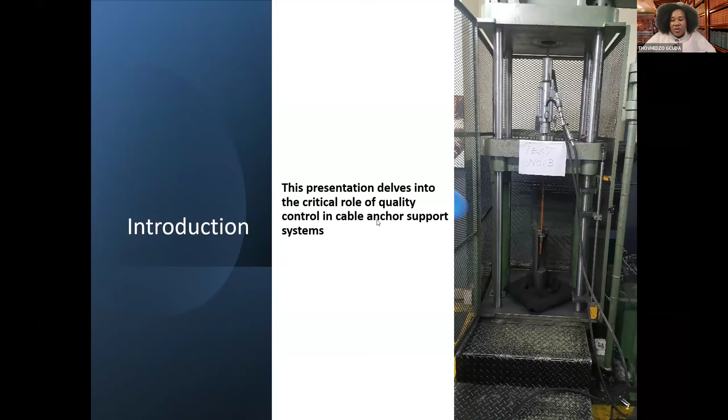So cable anchors are used where there's high support demand, more especially in our poor ground condition areas, as well as areas where we've got large excavations or capital excavations. And in this case, because of the high risk of fall of ground, if quality control is not done properly throughout the value chain, then we risk having a massive fall of ground that will disrupt production. For example, if that is in your conveyor belt, that means you cannot continue mining because you cannot transport the ore. Or if it's in a crusher, then you're going to be losing equipment.

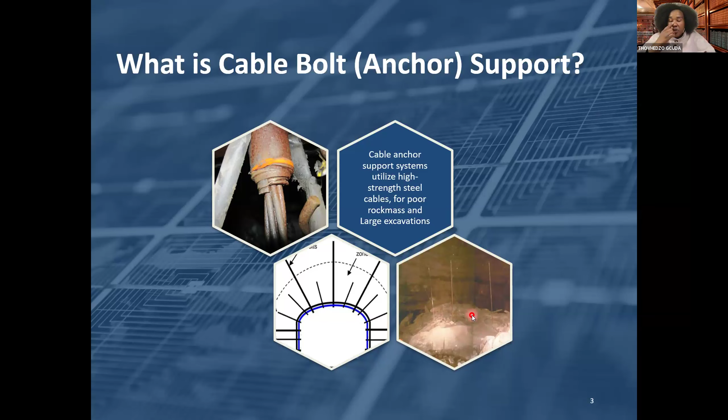And then in an unfortunate case, we normally have multiple fatalities because in these excavations, for example, if it's a workshop, there will be machinery and there will be engineers working on that machinery. So when there's a fatality, it normally involves more than one person. So that's why it's important that we do proper quality control to enhance safety.

So here I'm just describing what the cable anchor is and how it looks. So the length can be variable. Our primary support, normally a resin bolt, could be anything less than 2 meters. The longest could be 1.8 meters or 2.2 meters. So when we require secondary support, then the cable anchor has a length of about 2.5 to maybe 6.5 meters. And then in massive mining, it can be more, maybe more than 10 meters.

So these are the components of the cable anchor: you would have the barrel, and then you'll have the face plate, and then you'll have the grout tube, which we use for grouting, and the breather tube that will show if the hole is full of cement. And then you'll have the expansion shell, which is used for anchoring.

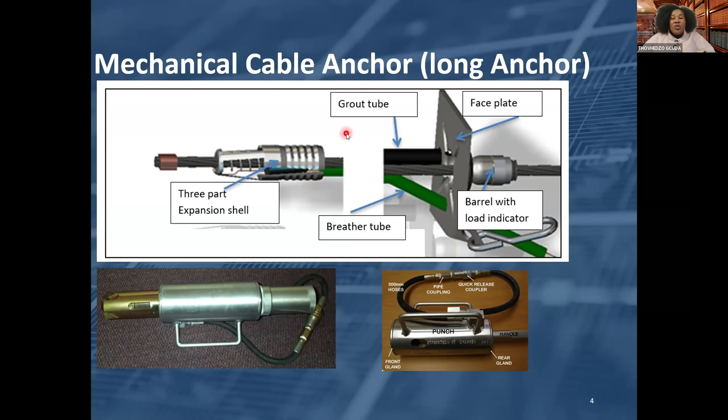So my main focus will be on mechanical anchors, because here in South Africa, most operations are still using mechanical anchors, although there are a few mines that are fully automated. So the installation method is normally conventional, whereby you still have human intervention, or semi-conventional. For example, for this one, we've got a remote drill rig, whereas here it can be semi-mechanized, whereby the twin boomer will drill the hole, and then a person will be required to go and grout, or even insert the cable anchor and tension it. However, with the twin boomers, some cable anchors can still be tensioned with an adapter using the drill rig.

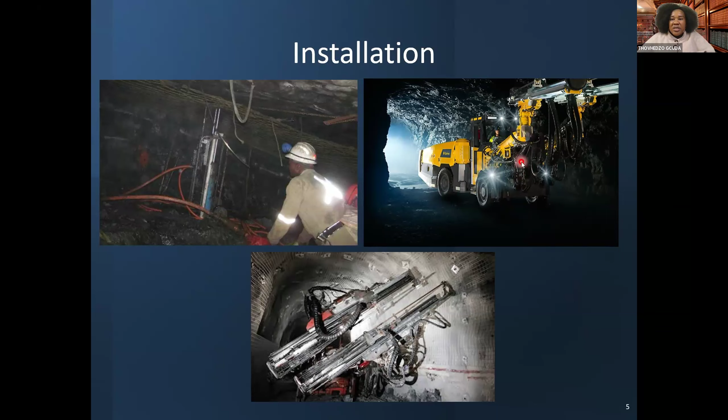So the support principle of cable anchors: we use it for different failure mechanisms or support mechanisms, of which in this case we'll be using it to build a thick beam. For example, here we've got laminated strata. As we know, the thinner the beam, the higher the risk of instability. So you'll want to clamp these beams together and then anchor them into competent ground, so that this one solid thick beam will be more stable.

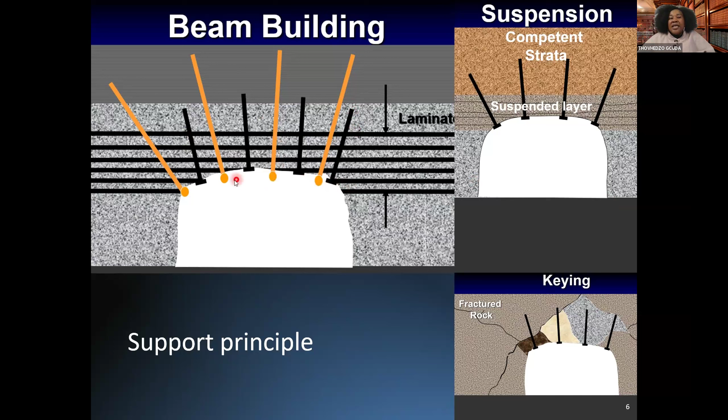And then in another case, you'll use it where you've got poor ground conditions overlaid by competent rock. For example, in our coal mines, after mining you could have a layer of poor quality coal that you want to suspend into a competent sandstone. And in the case of poor ground conditions where you've got fractured rock or key blocks, you would want to stabilize that using cable anchors. So in each of these cases, if these cable anchors are not installed properly, if the quality is not good, then there's a high risk of fall of ground.

So cable anchors are regulated by different standards and regulations: the international standard, the ISO standard; the local standard, the SANS standard; and then the Mine Health and Safety Act, Regulation 14, which requires that the rock engineer must ensure the quality control of the support product. And then we also have the mandatory code of practice, which is the guideline issued by the Department of Minerals and Energy and Petroleum here in South Africa.

In that, you are required to state how you will ensure quality control of all the support products that we're using. And then from the code of practice, you'll develop the standard operating procedure, which will state how we are going to ensure this quality control. For example, what will be the frequency of your pull tests, how often will you be doing inspections, and what are you going to be looking out for during these inspections.

So in terms of manufacturing, ISO 6892 and ISO 9001 are the two standards that are followed during the manufacturing process to ensure that the steel is of high quality. And there are also some standards here in South Africa. I couldn't get much detail on those standards because they aren't free, so I'll need time to convince my head of school so that I can purchase them and read through them. With AI, I've noticed that most of the data you get online is not really accurate, so I prefer to read the actual original paper before I reference some of those standards.

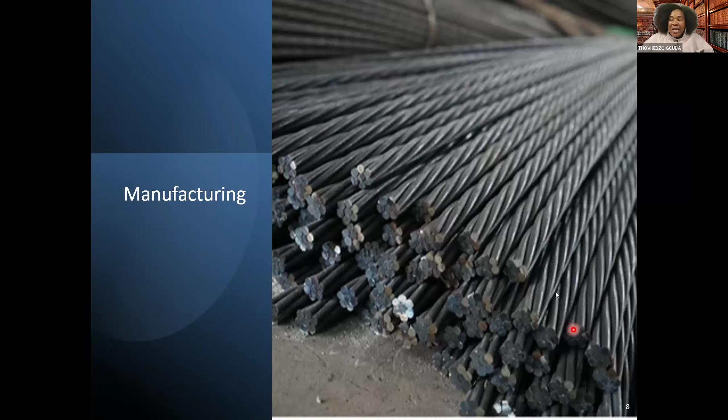All right, so after the manufacturing process of steel: at the moment, most of the steel here in South Africa is manufactured in China. Here in South Africa, I think there's only one company that is still processing steel, and the rest of it is imported from China. So it's important that our manufacturers make sure they've got the right certificates that show all the right procedures have been followed during the manufacturing of the steel.

So after assembling the product into a complete cable anchor, we must conduct a pull test at the lab to check the tensile strength of the unit. By the unit we are referring to the plate, the barrel, the shell and the cable. And then it must be recorded how the cable failed and what the weakest component of the unit is.

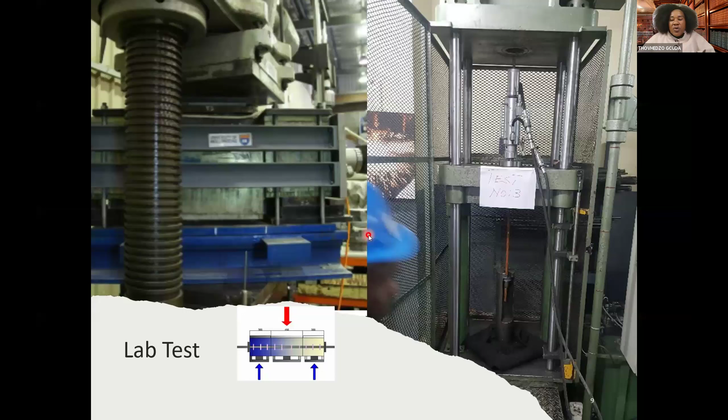And then shear tests must be conducted as well, because normally when failure happens, there will be lateral movement that generates shear stress along the cable. So the shear strength of the cable must be determined so that when we conduct the support design, we do not underestimate the load or the capacity.

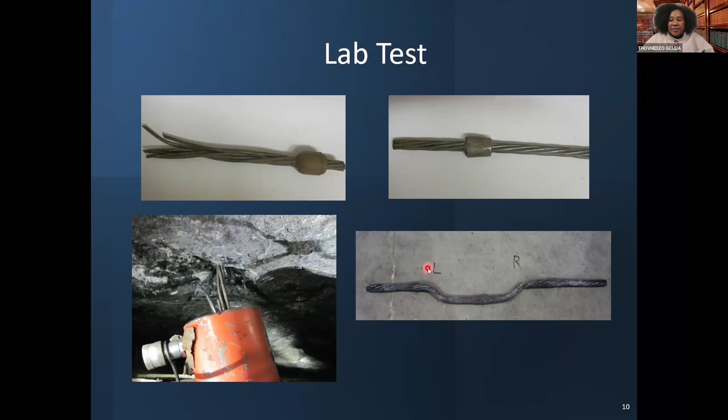And these are the results that will then be plotted, which is the load versus displacement. This is the information that we'll use when we design the support and factor in the safety factor. And then this is also the shear load. This is how the graph looks.

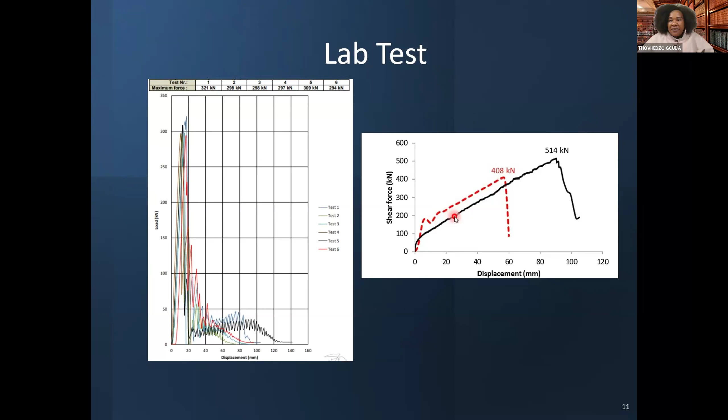So field tests, this will be performed underground. There are very few mines who do quality control and conduct pull tests underground, for various reasons that are valid, but I strongly recommend that at a given interval you must do your underground tests, just to make sure, and compare the results with the lab test.

For example, this test was a non-destructive test. As you can see over there, we stopped pulling at about 160 kilonewton, and then you can see the displacement over there. However, if you want to do a destructive test, you could do it from the sidewall, which is much safer, but at least you must know the actual performance of your support underground,

because a lot can happen to the unit while being transported from the factory, while it's being stored at the warehouse and the stores at the mine, and when it's being transported underground. Some components can go missing, or some components could get damaged. So it's important that you conduct those tests.

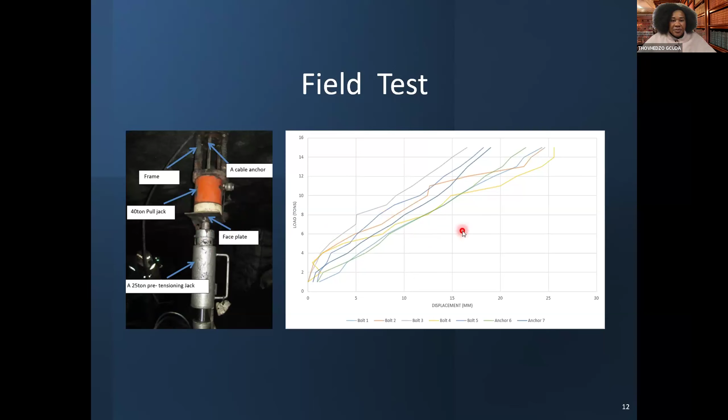And then field verification: it's important that at a regular interval you conduct a field verification whereby you check the quality of the installation of these anchors. You must focus on the hole diameter, because if it's bigger than the design, the cable support will not be able to anchor properly, and when there's movement the anchor could slip. If the diameter is too small, you will not be able to insert the anchor properly. It might get stuck halfway.

They must also confirm the length of the hole, because if it's too short, the operators would normally cut the anchor, and then you have a shorter length than designed. As we discussed in the beginning, sometimes the failure zone is above your primary support, so if you've cut the length, you have not sufficiently secured the unstable rock. And in terms of the angle, if it's less than 90 degrees, you will not get the required effective height.

You must also look at the spacing, because this will determine your support capacity. If the spacing is too open, your safety factor is not sufficient and you don't have sufficient capacity, which can induce a massive fall of ground. If the spacing is too small, the cable anchors come at a cost, so you will spend more than you budgeted.

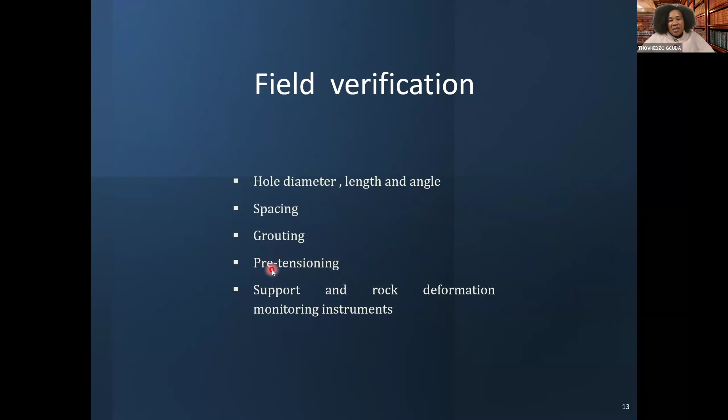All right, so in terms of quality control, what can we do then to improve quality control in our cable anchors installation? So we need to consider installing cable anchors in a mechanized manner.

For example, using drill rig, fully automated installation. I know in some countries they're already advanced, they're already at this level. We need to adopt this as well. And then if it's automated, then we know it's going to be precise drilling. We know that there are some automated drill rigs whereby you can just put in support spacing and then continue drilling at that pattern, whether 2 meter by 2 meter, or 1.5 by 1.5 meter.

And they must also consider automated grouting and grout mix, because if the grout is not mixed properly, then you're not going to get the required bonding as well as the shear strength. So if it's automated, then there will be history on the system to say which support was installed when and what was the quality.

And then also real-time pre-tensioning. For example, when the rig is busy pre-tensioning, you could have information from the cable anchor to say what is the pre-tensioning there. And then if there's a load loss over time, you should be able to see that even after the installation has been done. And then also monitoring.

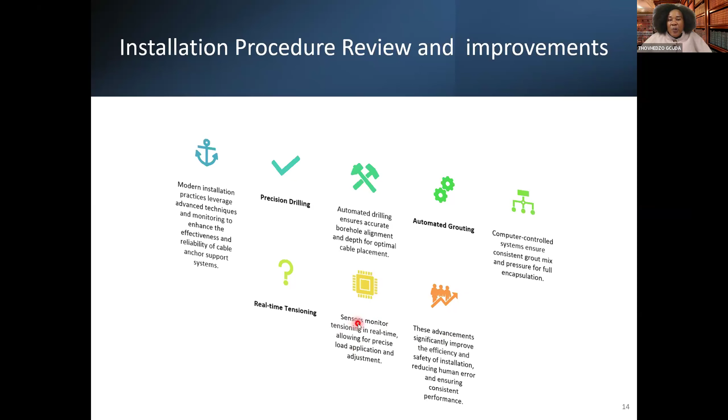So with all these improvements, then it will assist to make sure that our cable anchor support is reliable, and also with now the issue with the environment and global warming, then we can reduce our reliance on sticks as support, whereby we have to cut trees and then use them underground. We can confidently use a cable bolt as our primary support, even our stopes, even our advancing face, even where we are blasting, we can blast knowing that we will get an effective support. And if it is not effective, our monitoring devices will alert us.

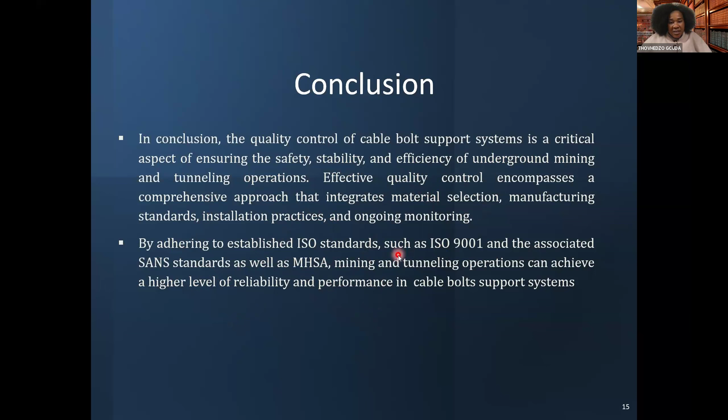So in conclusion, the quality control of cable anchors is critical to ensure safety and stability, as well as efficiency in our underground mines, because this will enable us to optimize our support with confidence. And also by adhering to ISO standards, as well as the associated SANS standard, as well as the Mine Health and Safety Act, this will ensure our safety in our mining operation and eliminate the fall of ground fatalities.

And yeah, thank you very much. That is the end of my presentation.

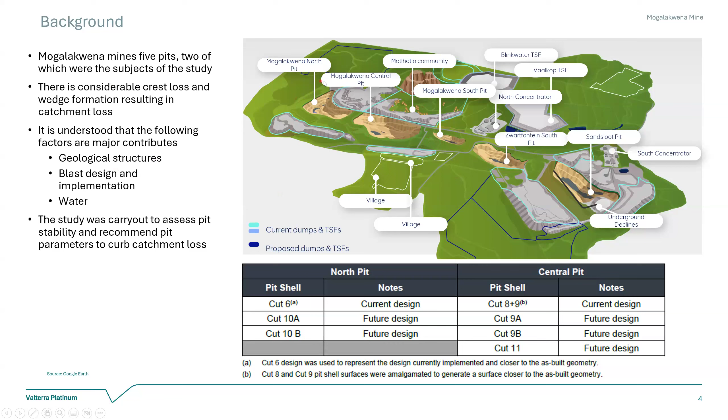We took the current factors into account, largely the geological setting of the area, the structures, and the blast design we need to implement. We also looked at the water, but I'll take you through that in depth in the presentation.

So they were utilizing smaller equipment. Then when we moved towards the Central Pit and North Pit areas, we optimized because our rock mass is largely hard. They had stack angles of 70 while keeping the bench height of 15, around 160 meters deep with an interim angle of 55 and bench face angle of around 90.

So in 2016, the problem with the 2013 design was that it had berms of around 7.2 meters, and this was largely a rockfall risk because we were not able to consistently achieve that 7.2.

So in 2016 they undertook a slope optimization project, which was key, introducing double benches in around the Central and North Pit areas. This enabled us to steepen our stack angles from 55 to 60 while introducing a catchment width of around 22.6. This was largely a success in some ways, but not highly optimal, as we still had areas mining 7.2 meter benches, which were high risk.

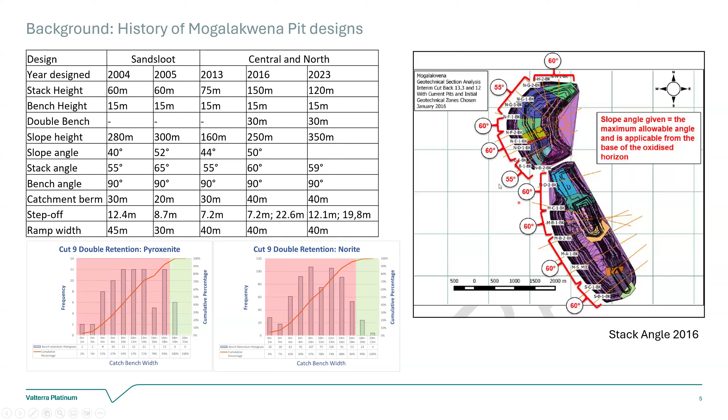Look, the scope looked at Central and North Pit as discussed. We reviewed our geology because largely some of the designs were the same, either in the hanging wall, which is norite, and the footwall, which is pyroxenite or granofels. Some of the designs were similar.

We had to review the geology there so that we can tailor-make for the different geological domains. Then we looked at the geotech model, entirely looking at the structure, the water, and the rock mass information. Then likely again, we looked at the bench conformance data, which is what we are currently achieving in terms of catchments in those areas.

So then we utilize the DFN to generate the stability assessment. From the stability assessment, we conducted some sensitivity analysis on the water and some material to ensure that we double check if the model is highly sensitive to certain parameters. Then we provided some of the recommendations, which were touch-based.

So generally, what is a DFN, which is a discrete fracture network? What does it utilize? So mainly we needed to map the site and review our borehole data information. And this was an extensive exercise that was done.

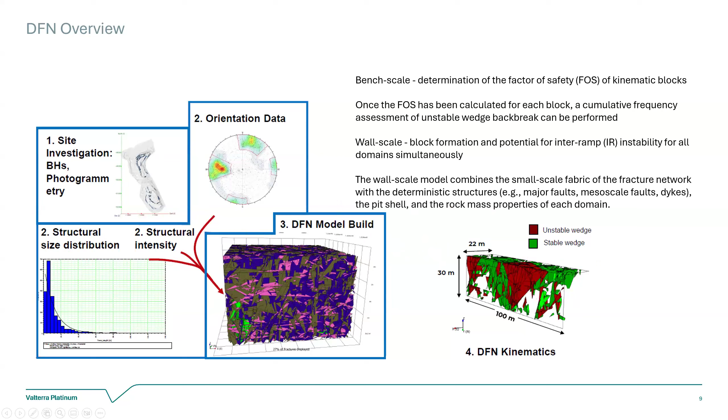Just to look at some of the material properties for the site, to give you a big background of how the site is. We have a UCS around 200 MPa in the hanging wall and footwall. Pyroxenite is still very high, which is around 166. Look, largely these are massive, as you can see from the GSI parameters.

Then we also, since we do not have a lot of piezometers on site, we ran pore pressure analysis by doing an increment of 0.05 using the RU values there of 0 to 0.4, where 0.4 is highly saturated. So we did an increment.

You will see some of the sensitivity analyses that were done. We also ran different scenarios to just double check some of the parameters, where the base case was having a joint strength which we discussed here in the domains.

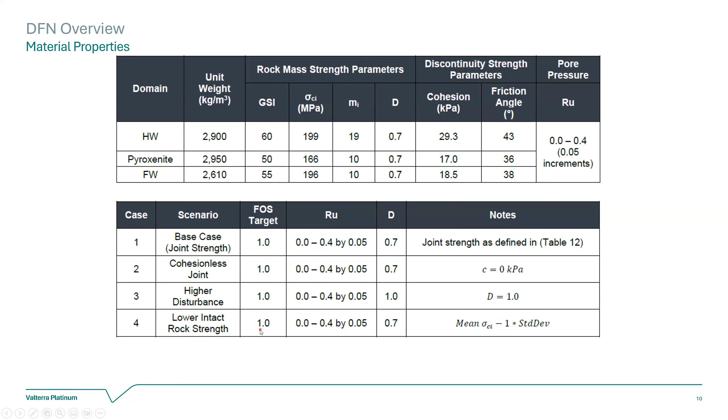But then we also ran a scenario where we have a cohesionless joint. Then we also ran a scenario where we have high disturbance factor from 0.7 to 1. And also we have a scenario where we have a lower intact rock strength, where we used the mean UCS minus 1 standard deviation, just to simulate if our model is highly sensitive to these conditions.

So the two pits, after mapping them, we produced the stereo nets, and we definitely had to read domain according to the stereo net. The structural data actually shows us that we have different domains that we need to change to, so we cannot have designed the same across all the pits compared to the 2016 model, where in central pit everything had the same inter-ramp angle. So we had to adapt to each structural domain.

Intensive mapping was done, then we produced the structural domains, and we domained these pits in accordance to pit orientation, and it will have different designs. This was central pit, and this was the current pit in north pit.

What acceptance criteria did we use? Obviously for bench scale, we ran for two scenarios as well. We assessed for bench scale stability, and we also assessed for inter-ramp scale or a whole scale assessment.

So for bench scale, we're targeting 80% reliability of the benches, achieving 8.8 meter berm on a single bench. This 8.8 actually comes from the modified Ritchie, but we verified this modified Ritchie by running a rockfall analysis, so that we can ensure our guys are safe as they mine. So 8.8 for single bench was deemed acceptable to cater for rockfall, while 12.5 meter berm with 80% reliability for double bench was deemed acceptable for the rough conditions we have in the pit.

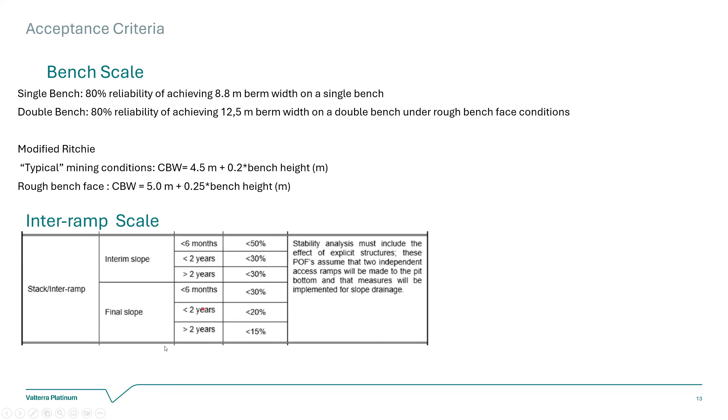Just to discuss some of the analysis, the row on top here is a single bench configuration with a 7.2 berm configuration that we currently have, in 15-meter benches over a 100-meter stretch that we're analyzing for. From there, we created a DFN model that covers our bench configuration, which was 15 by 20, and then we ran the stability analysis.

It will give you this block generation, and the blocks in red mean factor of safety is less than 1, the blocks in green mean factor of safety is more than 1. This is run with multiple realizations up to 50, so that it can give you a back break.

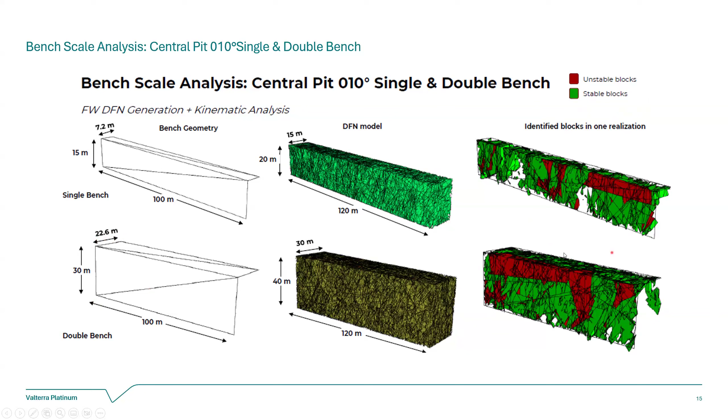So for double bench, we had a berm configuration of 22.6 with a 30-meter high, with a DFN box of 30 by 40, and we did the same scenario. We had 50 realizations that give you the stability of those blocks.

From this slide, just to take one of the sectors, sector 60, this is the illustration of the back break that was there. So we can see from the conformance data, the DFN was saying we are going to have a back break of around 3.5 meters from the crest. But what we're achieving in our pits is more than around 4.5 to 5 meters of back break. The difference here is largely the mining-induced activities, which is scaling, drill and blast, and other mining operations that were there.

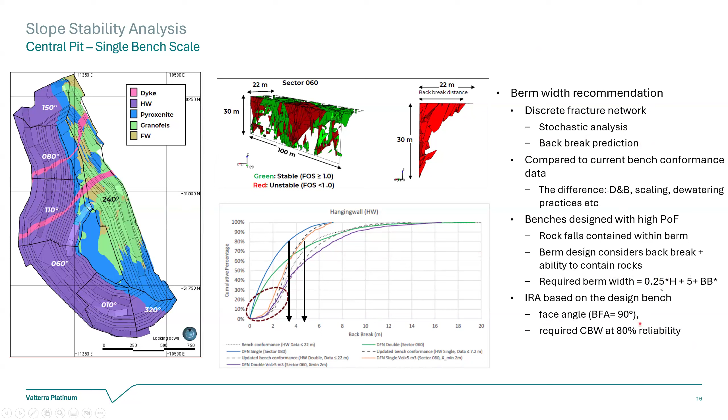So obviously we ran a stochastic analysis and had a prediction of the back break. Then we used that with modified Ritchie to come up with the recommended bench height and bench width that we needed, with 80% reliability, making sure we achieve those minimum criteria that we had.

I'll jump before I go to the recommended parameters, let me jump straight to the whole scale. This was the whole scale that we ran in Central Pit, and we can see we had a couple of areas that passed our criteria. Mostly the areas that passed our criteria of 30% were where the pyroxenite area is, which is our reef, and our reef is largely slightly weaker than our norite.

And those ones that passed in the norite were associated with the faulting that we have in those areas, around about this area, and that was largely affected by the RU values as you go. So we targeted that if these areas we can dewater them, we'll be able to reduce the probability of failures in those areas.

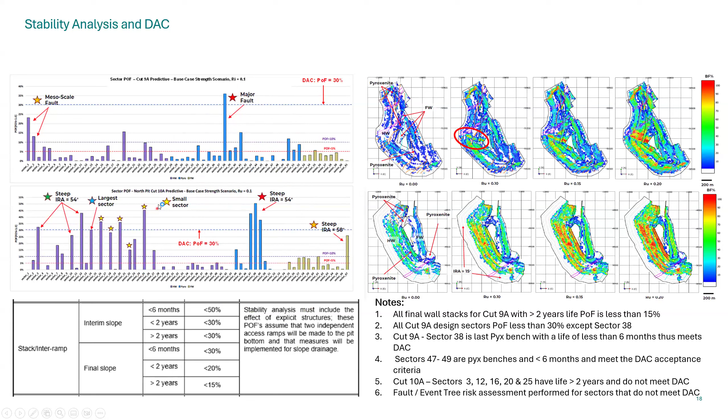This was just to reiterate the recommended inter-ramp angles. We changed some to be steeper where needed. In areas where we saw higher faults, such as area sector 38, which is around this area here that I'm denoting, this is deemed correct because we were mining this sector in the last 6 months of the operation.

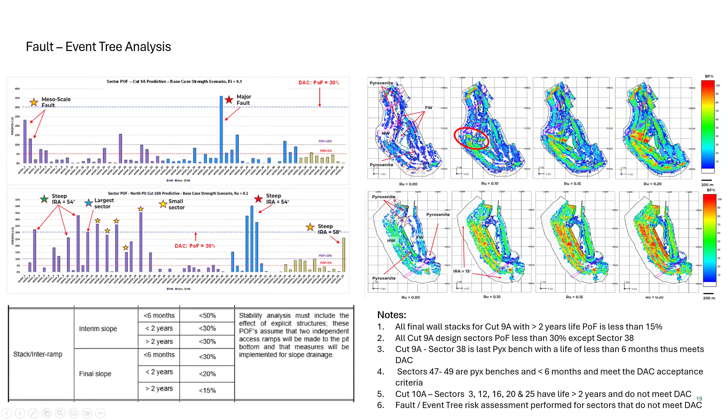Key areas to look for in our sensitivity analysis were those areas with faults where we needed to start a dewatering program. We collaborated with the hydro team to strategize and focus in those areas to make sure we keep them dry, reducing the probability of failure so that we can mine the area and see through the design safely. Those were associated with the fault, but we also had to change some orientation, which I'll show in upcoming slides.

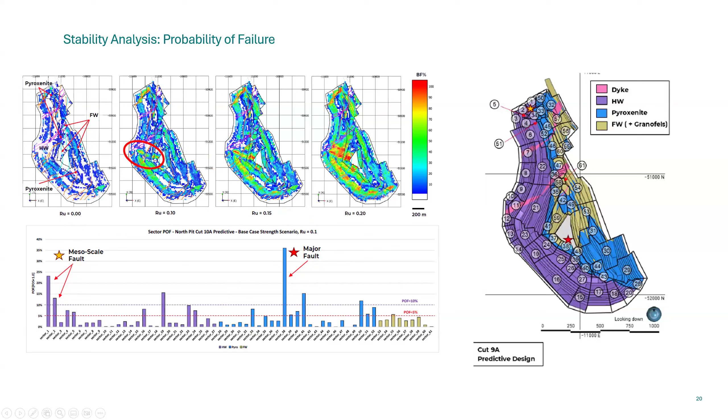A fault tree analysis was conducted for most of the areas that failed. As you can see, we were targeting to be in this region here. We had to put in additional controls, including 2 radars in the area - the FMCW and the XT radars - for tactical reasons, so we can highly optimize monitoring, while having the FM radar in the same areas for strategic reasons to see through and have a bigger monitoring project so we can detect slow moving, deep-seated failures.

In the same area we have redundancy monitoring using laser scanning by Maptek, which is a sentry, verifying the information from the two radars. We coupled that with prism monitoring and visual monitoring from our team members. We also declared the area a special area, meaning additional operational controls are put in place limiting activities within that region. This brought the annual probability of fatality within the acceptable region.

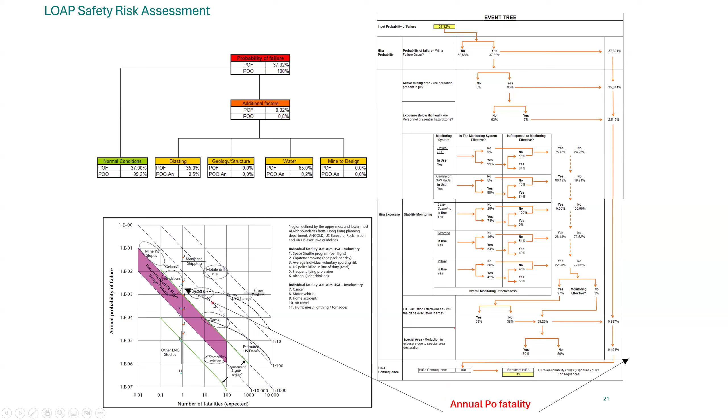Let me take you through the sensitivity analysis. We looked at the effect of water and saw that it correlates highly with the faults, so we strategized monitoring from there. It increases with the RU values. We also looked at the effect of orientation.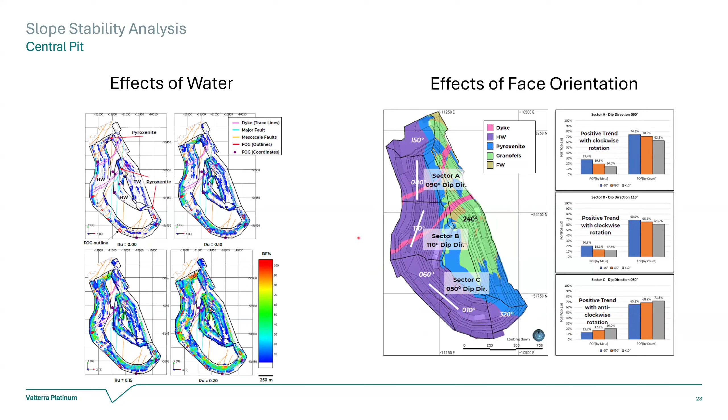In sector 60, if we did the same and rotated 10 degrees clockwise, our probability of failure increased. So for some areas with faults, to be in the acceptable region, we had to go the opposite direction, 10 degrees backwards, which enabled us to be within the compliant region for probability of failure. With that in mind, we had to honor this proposed orientation to be in an acceptable region and see through our cuts safely without problems.

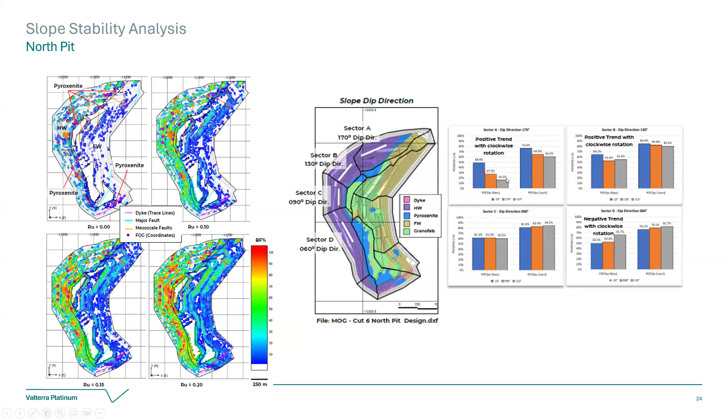This is the same analysis we did for North Pit. North Pit had similar trends for area 170, around area 170 in this region. Turning 10 degrees clockwise also showed lower probability of failure. So we had to change some of the orientations for future cuts in this region.

So largely we needed to put some controls operationally so that our critical controls can be optimized so that we can move towards the improved conditions post 5 years after we have achieved good practices. And that made us put actions like develop new drill and blast designs so that we can have proper high wall, proper presplit, and good high wall condition for all, right? Also to protect the areas from overblasting.

Some of these controls also involved looking at our scaling processes where we are putting PTOs in place so that we can monitor that they are not overscaling the crests, but they are just scaling off the loose rocks. So we developed a different PTO process that we needed to do.

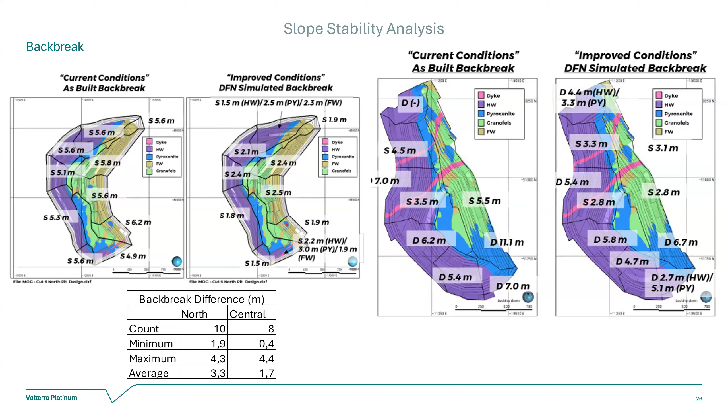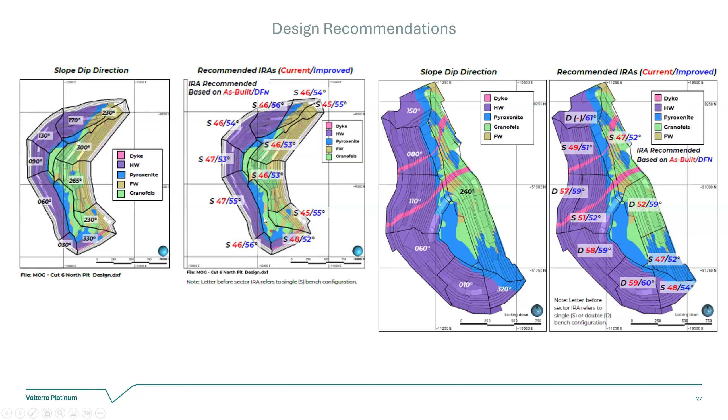But North Pit has largely more effect. So if we are not going to improve North Pit, we will have around about 10 degrees that we can optimize if we put controls in place, and this became a high priority for critical control to now start improving, and we are having a good run of critical controls in that area.

Just to conclude, these are the parameters. For operational reasons, we could not have a lot of design sectors. For design sectors that had close parameters in terms of bench width or inter-ramp angle, we had to sum them up so that we can issue to the mine planners so that they can start designing. So we summarize the design as follows.

But what I wanted to highlight in this table mainly is that where we have a high wall pyroxenite, we are no longer doing double benching at all. We have reverted to single benching with a shallower inter-ramp angle, with a bench height of 15 by 15, but the stack will remain at 120. And then we simplified the domaining so that we can achieve good operability, and it's easier to just design a flowing pit where the parameters are very close together.

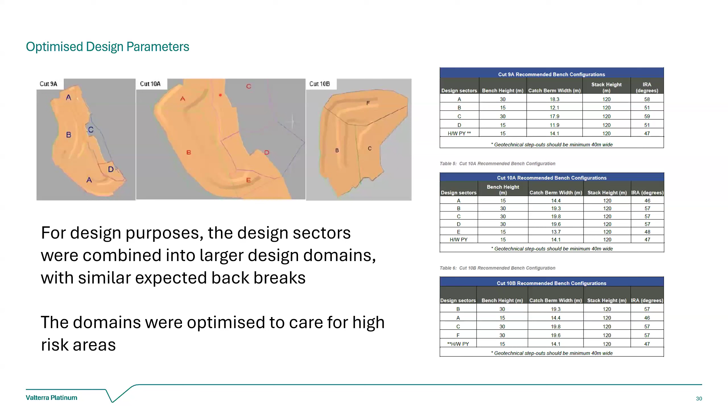These were similar... Oh, right, so it's the same slide.

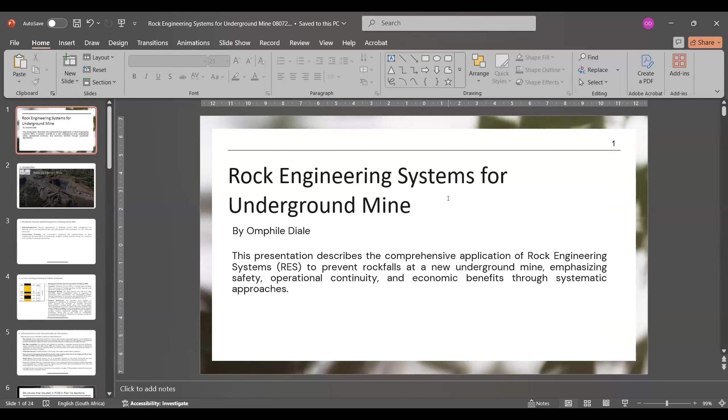Good evening, ladies and gentlemen. Like Glorious has already introduced me, I am Omphile Diale, and I'm currently at the Sefateng Chrome Mine. Today, my presentation is about systems that are employed at Sefateng to combat rock falls. This is a picture that was taken at Sefateng Chrome Mine in 2022, 2023, showing the belt there and the portals into the mine, which are developed on reef. Just before I start the presentation, I would like to extend my sincere appreciation to the management at Sefateng Chrome Mine for allowing me to use the operational data and photographs for this presentation.

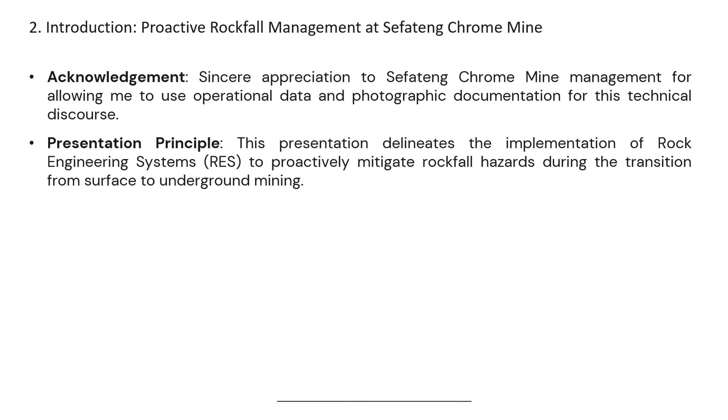As stated, I'll be going through all the systems that we had used for rockfall combating. Just to give a brief context, Sefateng is located approximately 100 kilometers southeast of Polokwane, just along the R37 road. It's exploiting its resources along the LG package, which is the chromitite seams, the LG6 and LG6A. So what led to the project was in 2022, when the mine started going underground from open cast, it experienced a lot of rock falls along their transition from surface to underground. And this resulted in management requiring us to try and look into what are the things that are really causing these rock falls and how we could mitigate them going forward.

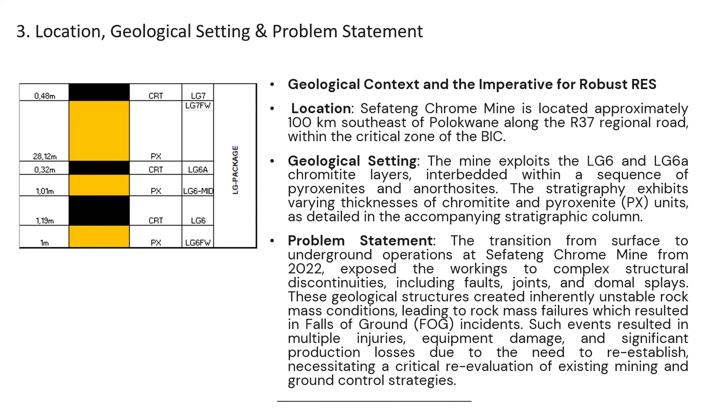So initial geotechnical assessments and characterization had to be conducted, and all the falls of ground that occurred had to be analyzed. And as it is well known, in the rock engineering department everything requires data collection. So data was collected by the strata control observers underground through their mapping of all the geology that was present. Rockmass characterization was then conducted from the data that was collected using various systems that we use in the rock engineering department. The fall of ground accidents that previously occurred were also analyzed to try and determine the reasons for the failures. We looked into the structures that were observed: dome structures, wedge failures, the intersection of geological features, and low angle joints and near vertical joints intersections, also taking into account the prevailing support system that was in place at the time.

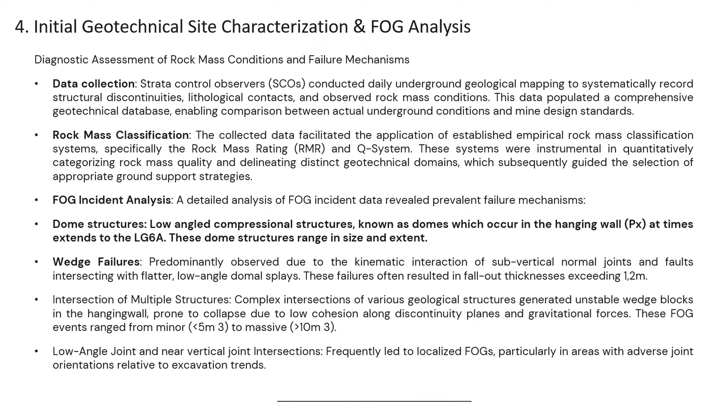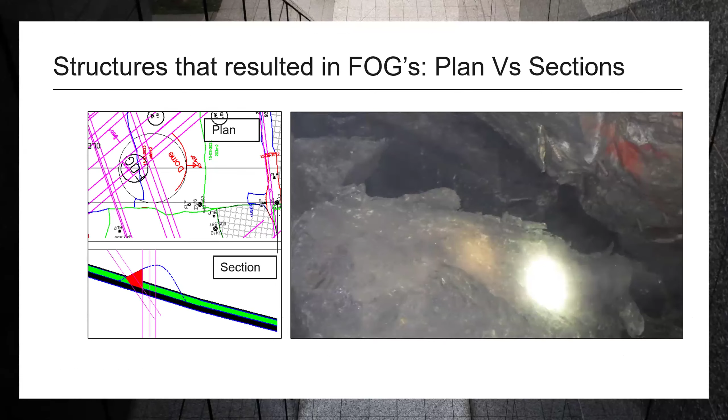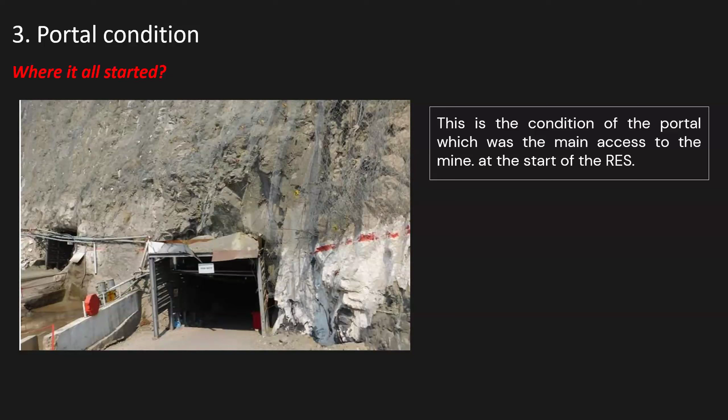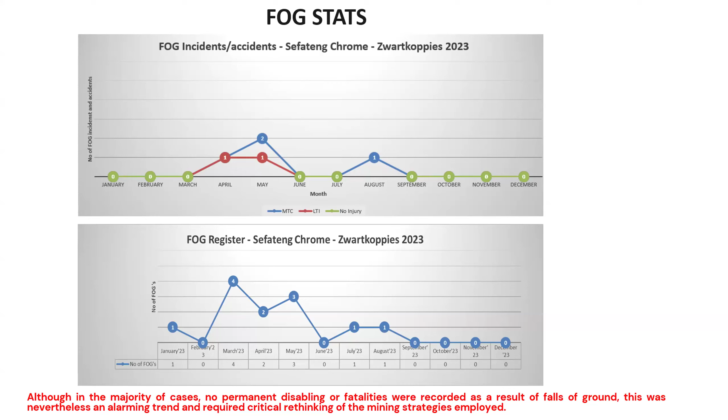So when the mine saw these stats, they knew that they needed to do something to change the way that they were mining. So the strategies that were implemented continue from where the data was collected. After the collection of the data, we needed to compile live reporting to the mining personnel. With that meaning, we needed to issue weekly reports to show the mining employees the condition of their underground, how their compliance is relative to the mine support standard at that time.

So this assessment took into account everything: the geology, the support, the compliance from the actual, and the different mine designs, because on the mine at the stage we were mining updips and breast panels, and we looked at where these fall of ground occurrences were more prominent.

And we then looked into the incorporation of new technology. For this presentation, I mainly dealt with the stopes. For the mechanized section, there were already other technological developments we were doing to monitor the ground conditions. So for the stopes, due to scraper winch cleaning, we then looked into the incorporation of Stratify technology. This will be dealt with a little bit as we proceed through the slides.

Numerical modeling as well was used to try and verify the empirical, to see if what the empirical data shows is also what we can see in the modeling.

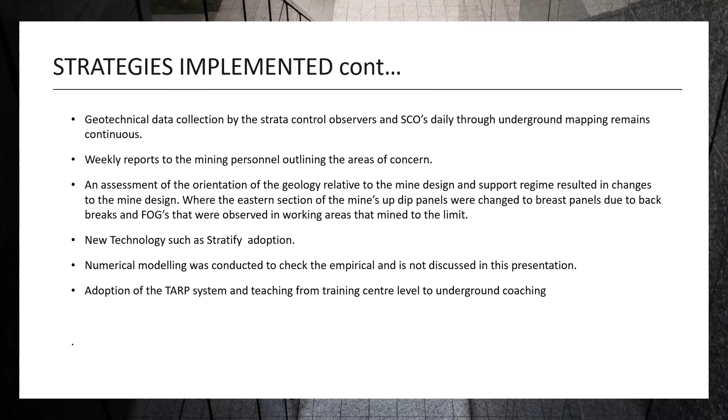Then adoption of the TARP system was something else. Like I said, the mine is fairly new, so going underground was less than a year when we started the project. So for the TARP implementation, knowing that the mine is actually in a rural area where most employees are from the community, which are novices, we had to take it down from the beginning.

Meaning we needed to teach the TARP system, which we deem as a risk assessment to identify these geological systems. So incorporating the TARP into the system also allowed us to assist the guys to have something to risk assess the mining conditions underground.

So the pictures below depict how our TARP booklets are at the moment. It will have a photographic image of the condition and a 3D picture of the type of feature that we're talking about. And also there's a summary in the book as to how the team must react to these conditions.

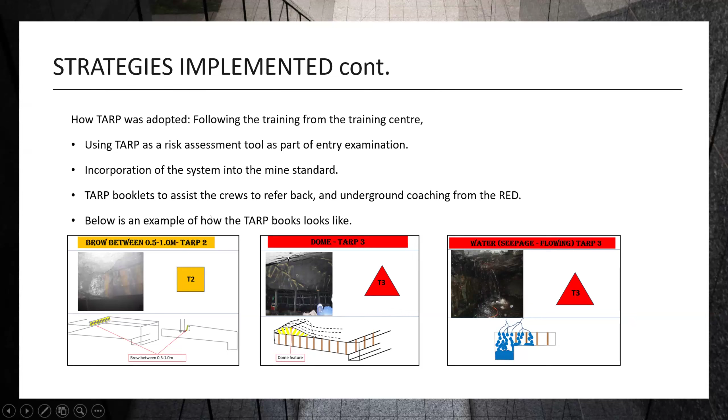So as I started from the top, the training center is our backbone, meaning the training starts from the training center where we then take it down to underground. I will deal with the TARP a bit later as to how it changed the mine. Going forward, this is adoption of the Stratify.

So the Stratify is modern technology where we're using LED to try and determine the conditions underground. Like I said previously, with some monitoring instruments, especially where scraper cleaning is being utilized, it's very difficult to ensure that the systems are not damaged and they work as effectively as possible. So incorporating the Stratify meant that we are able to observe the ground, the rock at the current phase.

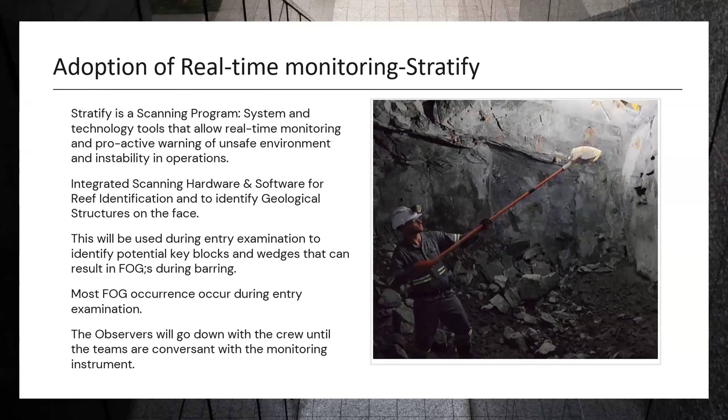So when you look at the machine, it will show you in red what type of discontinuity you're dealing with, if the support spacing is to standard or not, what the guys would need to do, and which area of concern we are looking at.

So this was a picture that was taken when the team was scanning our working areas as we're trying to determine how and where to use this Stratify.

Apologies about that.

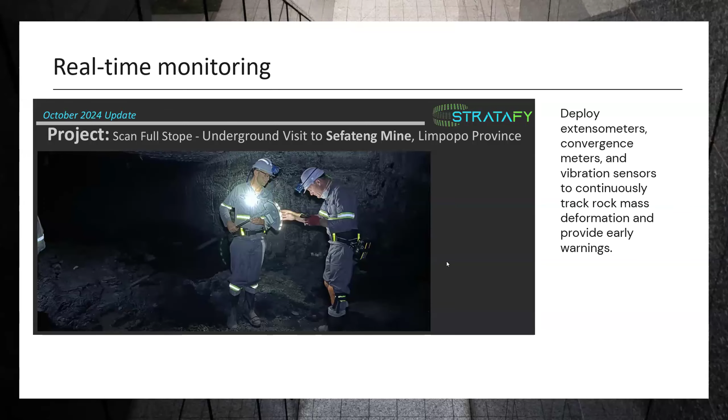The second picture here is a scan that was done for the length of the stope. Please note that these scans, you will only be able to see it when you're on surface. So underground, what you will see is whether there's key blocks, whether there's wedges, whether there's low angle joints that need to be addressed before the crew starts with their entry examination, and the scanning also needs to be done from a safe area.

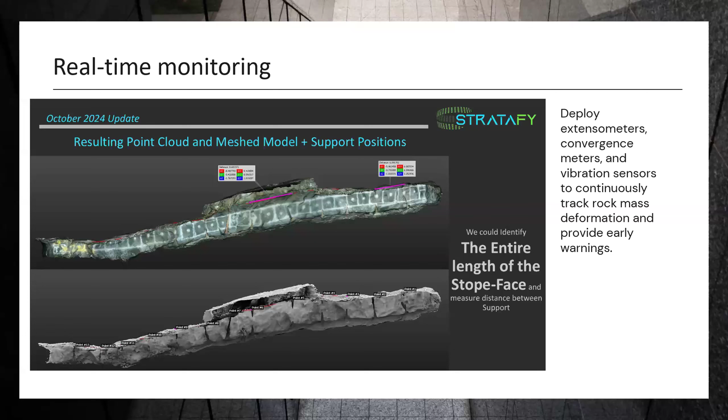This is also another representation of where the scanning of the panel after the installation of temporary support will then show you the spacing of the temporary support.

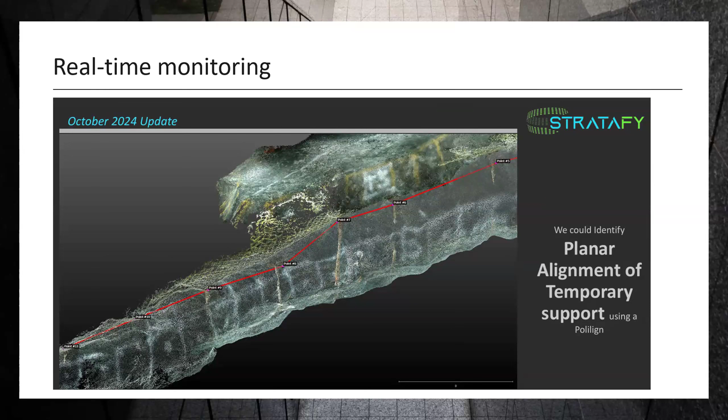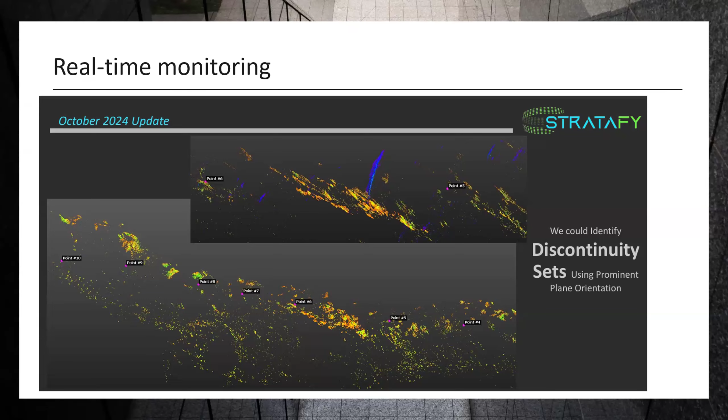This is also another plane orientation which can be seen when you open the cloud on surface, as well as the discontinuity set. So what the system allows us is that the mining personnel are allowed to identify the risk. The geotech personnel can then take data that was collected from the scan and analyze it for further information on surface to be able to analyze further what they want to see in that working area.

And going forward, with the implementing of our rock engineering systems, earlier I had a picture of the portal. So with the systems, we had to find a strategy on how to make safe the portals for our people going underground.

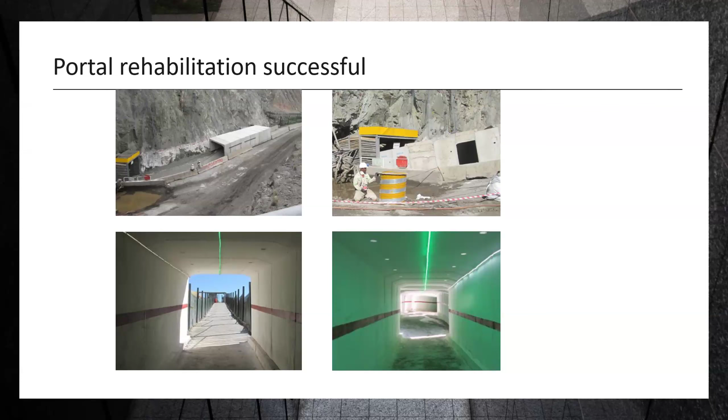And seeing from the previous picture, we have a quite high wall. So the most cost-effective way to make sure that men are allowed to go underground safely was for us to incorporate rock rollers along our traveling way into the mine, whilst we are also finding other strategies to monitor the side walls of our high wall.

So the portal rehabilitation was successful in that it incorporated robust rock engineering support, which allowed the safety of our people underground. Comparative analysis, when we looked at the 2023 and the 2024 stats, we saw that there was quite an improvement with the system.

Data that was collected underground was able to give the mining personnel live data of what was happening underground. Hazardous working areas were able to be stopped promptly once we were able to equip our guys with the knowledge of risk identification, where the TARP was incorporated and then involved.

This was the stats after the implementation of the fall of grounds. If we look at 2022, where we had 10 fall of grounds, 2 LTIs, 3 MTCs, and 2 serious injuries. In 2023, there was also 12 fall of grounds, 2 LTIs, 2 MTC incidents, and 1 serious injury. In 2024, we only had 3 fall of grounds and no LTIs and only 2 MTC incidents.

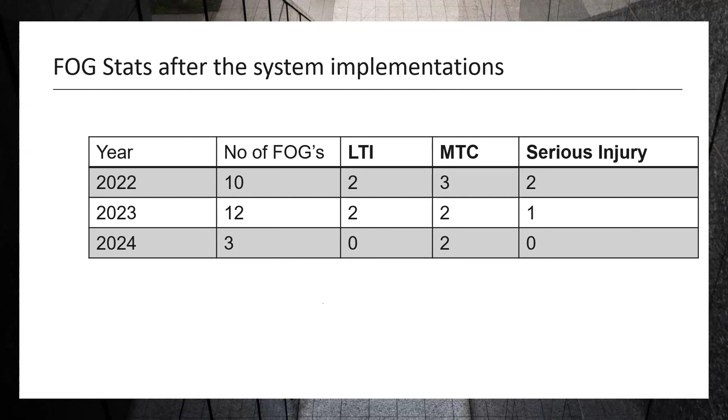And the MTCs that occurred, there was a fall of ground which occurred while somebody was installing a stick, which was a barring issue. Somebody was installing a jack, which was also a barring issue, and not a ground fall situation where our people were not able to identify these ground conditions.

And due to mining not being constant, as we mine deeper, we're still experiencing further challenges. So our attempt to combat rockfall does not only remain on the system. We've also seen that as the mining progresses, we're mining towards the crown pillar on the western side of the mine.

So now to further optimize our mining, we are looking into another holistic way of using these ground control, these rock engineering systems, where it's still in the pipeline, but we're trialing a system of trying to adopt a double cut mining method.

So what the double cut mining method would then entail is that because these rock falls are then falling up to the LG6A in the stopes close to the crown pillar, we're looking into mining the stopes at LG6A with different types of support strategies that will be shown in the following slides.

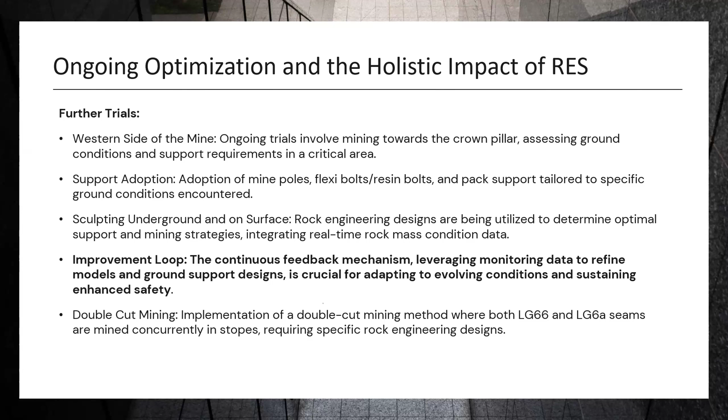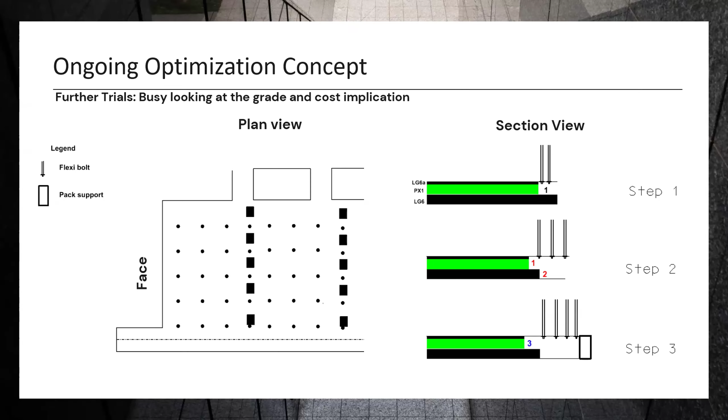However, further trials are ongoing, and this is another way that Sefateng Chrome Mine is trying to look into other ways of combating rock falls. Whilst this is still a concept, we're looking at things like grade and cost optimization, where in areas where you would only take your LG6, which gave you the best grade, you're now introducing waste into the system, which you need to take into consideration for your profits and other revenues.

I've already discussed this picture, which was going with the previous slide.

In conclusion, I can say that the systems employed at Sefateng assisted us to reduce the ground fall. This system mainly worked because of the integration of our rock engineering systems with communication with the mining personnel. Once the reporting was there of how the conditions were underground and what steps to take to combat these situations, we were able to mitigate a lot of risks, meaning in areas where we could have simply mined the area, we found other ways of addressing these challenges. And even if the TARP system has been something that has been in the game for a long time, it really played a major role at Sefateng Chrome Mine.

We enabled our novices and people that already have mining experience, and we equipped them with further knowledge of the prevailing ground conditions at Sefateng and ways on how to mitigate these risks and reduce fall of ground accidents. Because fall of ground remains one of the number one killers in the mining industry, continuous effort from the rock engineering department and management at Sefateng will continue ongoing. As mining progresses and exposes different structures, we'll continue looking at ways to find different methods of combating these rock falls. But I can conclude that the current systems in place really did play a critical role in the current stats of our mine.

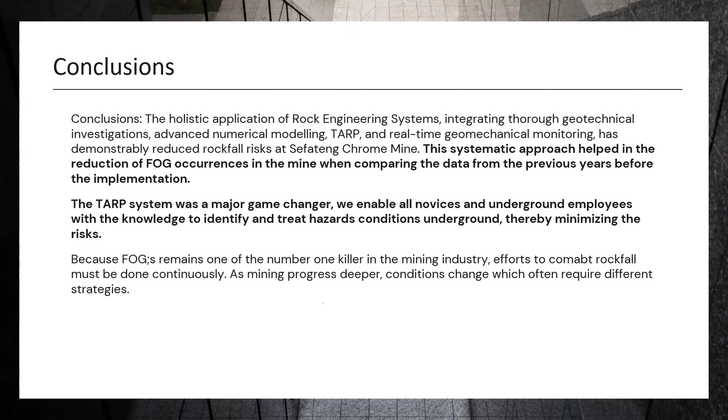We cannot celebrate production if it buries the people who make it happen. I want to be the voice that turns mining into a movement of meaning. Thank you, ladies and gentlemen. I'll be waiting for your questions.

Thank you so much, Omphile. I love the last part - I want to be a voice that defines the movement of mining. Wow. Thank you to all the speakers. We had very interesting presentations.